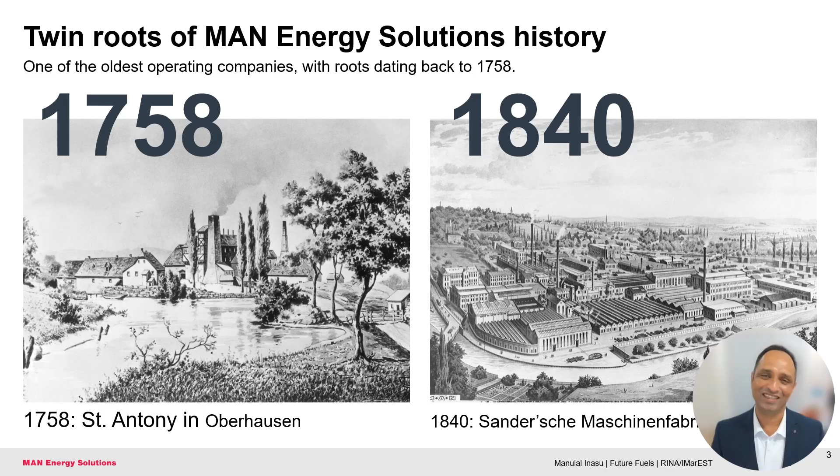He, of course, faced significant resistance from the fossil fuel industry, especially from the coal industry. This kind of innovation often demands courage and foresight. It was Heinrich von Buz, the general director of MAN at the time, who saw the enormous potential in Diesel's ideas. So MAN's unwavering financial and technical support was instrumental in bringing Diesel's revolutionary vision to life, giving the world one of its most significant technological advancements, the diesel engine.

So here is an interesting bit of history that might surprise you. When Rudolf Diesel demonstrated his engine at the 1900 Paris exposition, he didn't use petroleum-based fuel. He actually ran the engine on peanut oil. Yes, peanut oil. Diesel believed that farmers can grow and produce their own sustainable fuel long before sustainability became the global concern it is today.

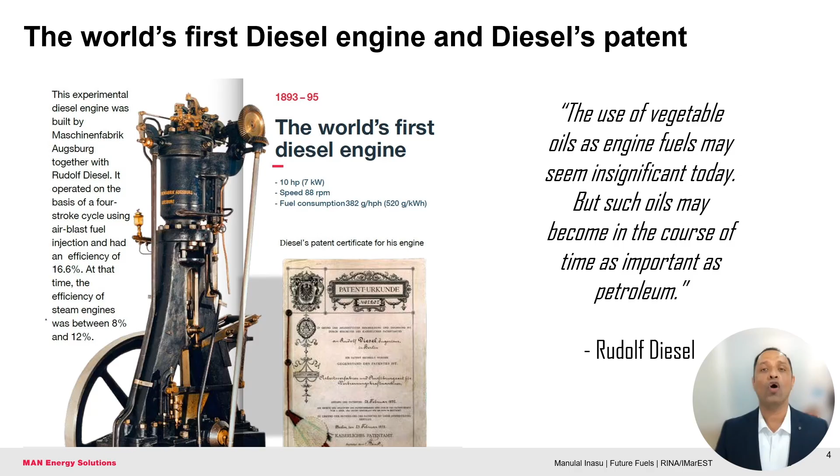When Rudolf Diesel said this more than a century ago, it might have sounded idealistic, but today it sounds prophetic. As we gather today to discuss future fuels and confront the urgent need for sustainability and decarbonization, his words have taken a new and powerful meaning. What was once a distant possibility is now a pressing reality, and the shift he imagined is the very path we are now walking. It's a reminder that innovation in fuel isn't new, and the seeds of today's transition were planted long ago. At MAN Energy Solutions, we proudly continue Rudolf Diesel's legacy, driving forward with an ongoing commitment to innovation and sustainability.

Now, let's move on to the next topic on the agenda, which is an overview of future fuels. In this section, I'll share a few slides highlighting key global trends, including how the world population and seaborne trade are evolving. We will also explore what the future fuel scenario looks like from MAN's perspective.

Let's first take a step back and look at why this is important and what role we at MAN play in the decarbonization of world trade, thereby contributing towards the sustainability goals set by the UN.

Today, nearly 90% of global freight is transported by sea. The vast majority of this freight is carried by large ocean-going vessels powered by two-stroke engines. Out of approximately 33,000 vessels in operation globally, around 24,000 are equipped with MAN B&W two-stroke engines. In addition, there are roughly 12,000 MAN four-stroke propulsion engines currently in operation.

Clearly, as a market leader, we feel an immense responsibility to drive this change towards decarbonization. We are committed to leading technology development in marine propulsion. Most importantly, we ensure that this progress happens in the safest possible manner, which lies at the core of our development process.

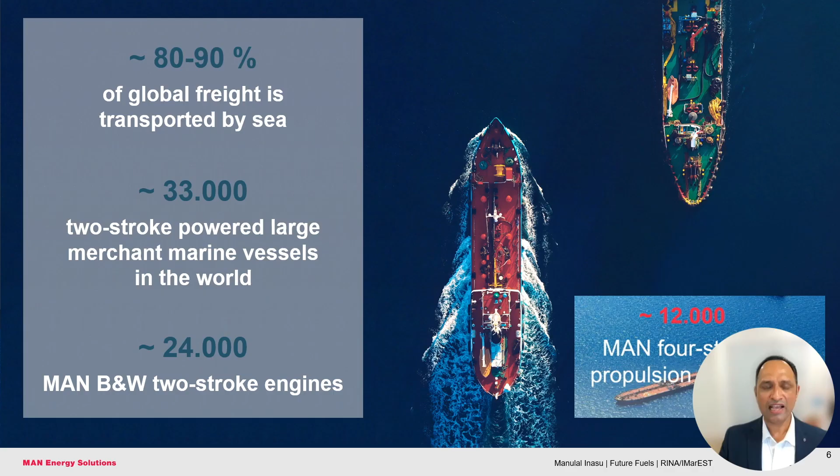Looking ahead, in the next 25 years until 2050, the population will increase by another 2 billion people. That's a current estimation. This will continue to drive increased demand for energy, infrastructure, food, consumer goods, and more. Since seaborne trade remains by far the most cost efficient and environmentally friendly way to transport goods, we expect that history will repeat itself and global trade will keep expanding.

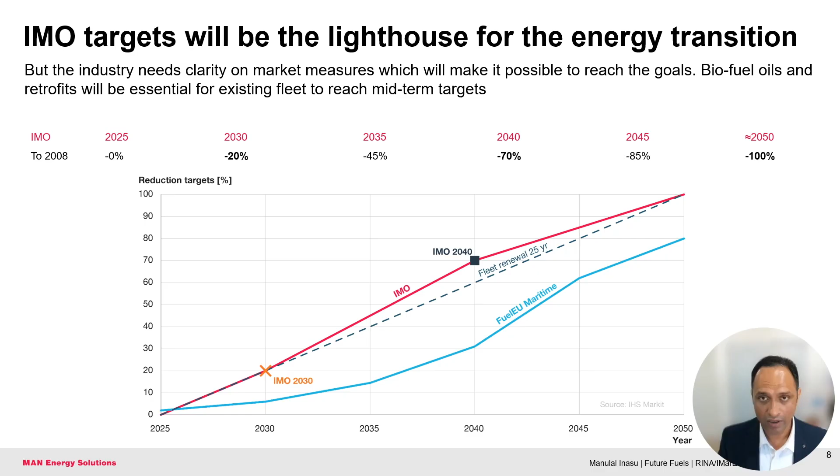And after all these, soon we will introduce our ammonia engines. Altogether, more than 1,400 dual fuel engines are in operation or in the order book, and this number is continuing to grow. So clearly, there is significant change happening, and this transition is gaining momentum.

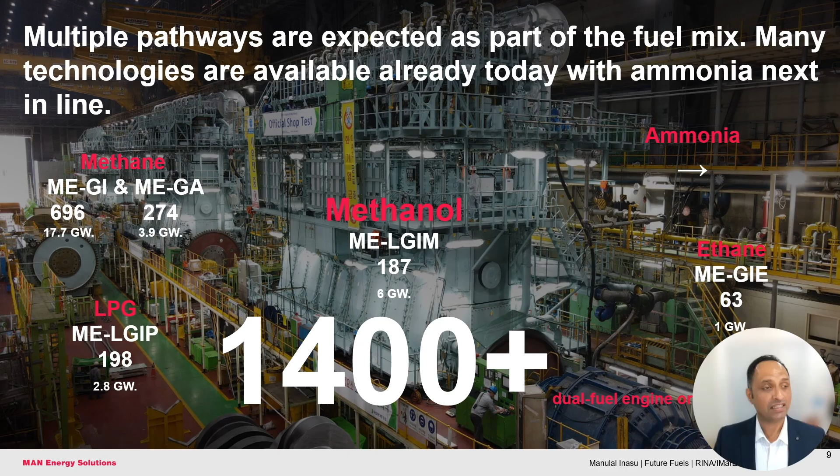So, what will the future fuel mix look like? In fact, this is the most important question facing our industry today, the one everyone is trying to predict. But it's not an easy question to answer, because the future fuel mix depends on many factors.

Earlier, I showed you the IMO targets set at MEPC 80, but I didn't mention the so-called midterm measures, which will be approved in 2025 and are scheduled to come into effect by 2027. These midterm measures will significantly influence which future fuels become economically optimal. Of course, the optimal choice will also depend on factors like ship type and size, technology readiness, operating expenditure, capital expenditure, and specific trading patterns. So all these factors will shape the future fuel decisions in shipping.

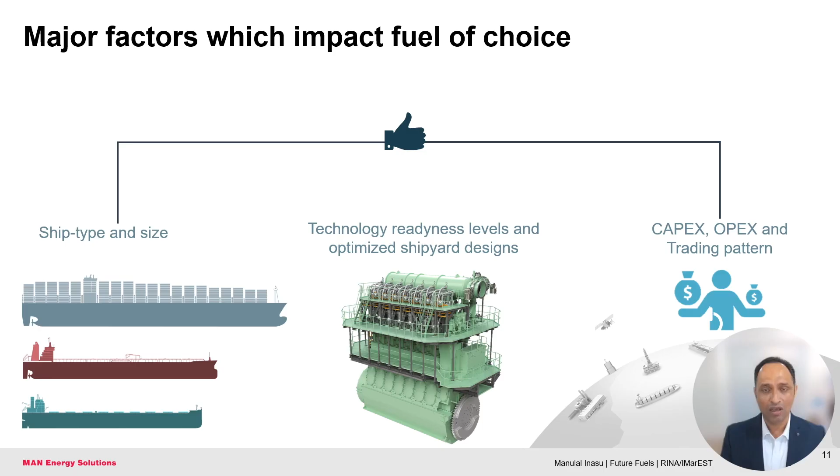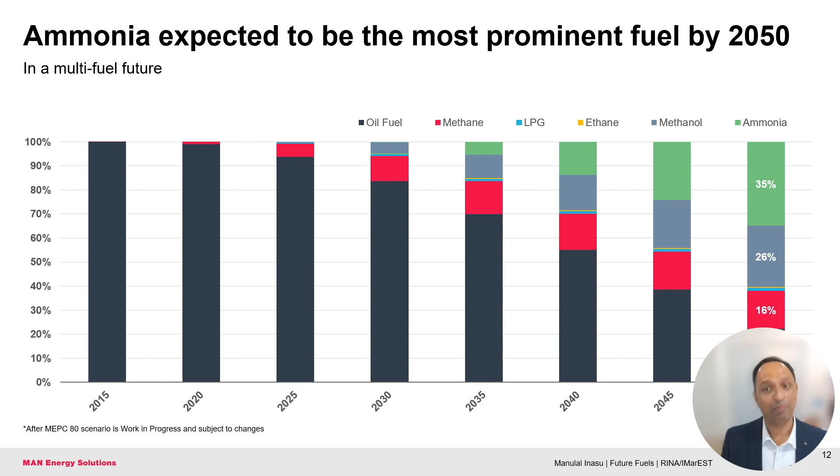So here is the next point in our agenda, which is focus on two-stroke ammonia. Even though all the fuel options besides traditional fuel oil or diesel can be considered future fuels for the maritime industry, from our perspective as an engine builder, most of these fuels are actually current fuels. This is because we already have engines successfully operating on these alternative fuel options today. So as an engine builder, when I speak about future fuels, I would like to spend some more time discussing ammonia. Ammonia, from our perspective, truly represents a future fuel in every sense of that word.

So why is ammonia considered a relevant fuel? First and foremost, ammonia has the potential for zero tank-to-wake CO2 emissions, essentially covering scope 1 emissions for the ship owner and scope 2 emissions for their direct customers. Additionally, ammonia can achieve zero or near zero well-to-wake emissions if it's produced as green ammonia, which would also address scope 3 emissions for cargo owners.

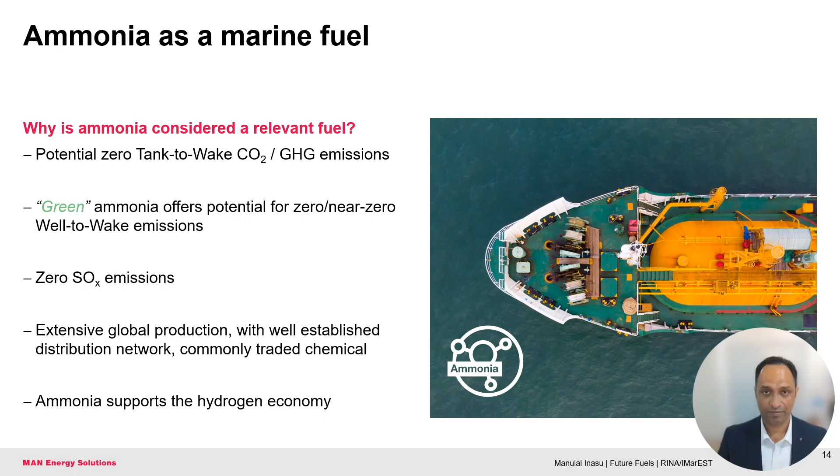Now, what's the status of our ammonia engine development? Our colleagues in research and development have made tremendous progress in recent years. I would like to quickly highlight some of their recent achievements. We have successfully run single cylinder tests on our research engine for a full year in our Copenhagen Research Center.

Five months ago, we initiated full-scale testing with our four-cylinder test engine. In January this year, we reached a significant milestone by achieving 100% engine load on ammonia with this test engine. In Japan, we recently saw the first commercial engine running successfully on ammonia.

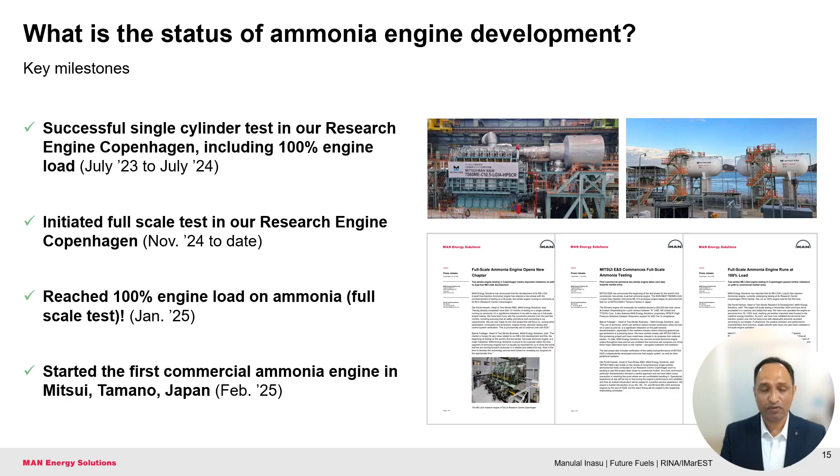To provide some context, developing an ammonia engine is no small task, and we don't compare it to any previous engine development projects. Due to ammonia's characteristics, especially its toxicity, attempting to fast track its adoption would be highly questionable. Therefore, we have adopted a very rigorous and careful development approach, which has also led us to choose a market launch strategy that differs from other alternative fuels.

Our ammonia engine journey started in 2019, over 6 years ago. Then we partnered with leading universities to study ammonia's combustion properties. In 2020, we received our second test engine in Copenhagen. Throughout 2021 and 2022, we worked extensively on specifying the fuel auxiliary and safety systems, and engaged closely with the municipality and relevant authorities to secure all the necessary permits.

Anyone who has visited our facility in Copenhagen knows there is a public school right across the street, which made it crucial for us to maintain a very transparent and thorough dialogue with the local authorities, especially regarding safety. This careful preparation paid off, and in 2023 we had our first ammonia bunkering, and then successfully conducted our initial single cylinder tests.

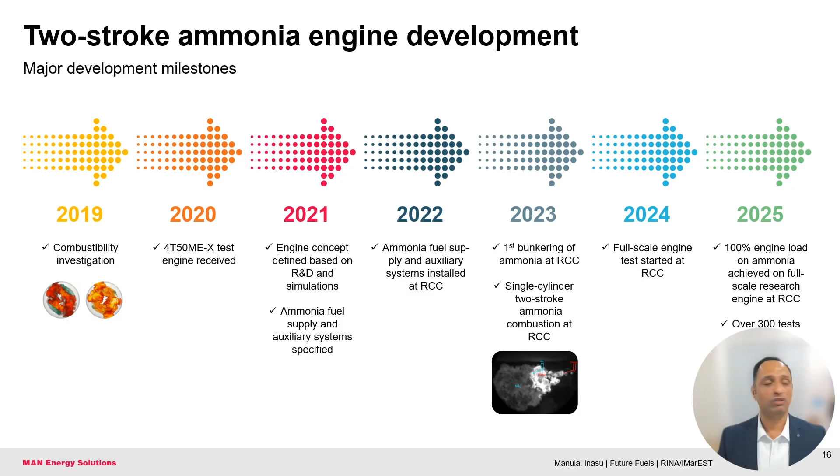After running the single cylinder setup for more than 12 months, we rebuilt the engine in mid 2024 to prepare for full scale testing, which we began in November 2024. Since then, we have got excellent test results, which we are pleased and proud to share with you.

So, MAN is announcing the start of a new reality for marine fuels. We can now openly say that ammonia as a marine fuel is indeed possible. Let's dive into some technical details that I hope you'll find interesting.

Here you see our ammonia engine testing setup in Copenhagen. It's a 4-cylinder 50-bore engine capable of delivering 6,300 kilowatts at a maximum speed of 123 RPM. All four cylinders are operating on ammonia, and they are equipped with extensive instrumentation with about 1,000 measurement points that help us gather essential development data.

The engine operates almost daily on ammonia, and we have already completed hundreds of hours of testing across many operational scenarios. In the following slides, I'll share some of the test results and general conditions which give us confidence that we have made significant progress in ammonia engine development.

We will begin by looking at the combustion characteristics across the engine as a whole. When the engine is running on ammonia, you can see here on the left side, we observe compression, combustion, and expansion curves very similar to other dual fuel engines. This consistent behavior is seen across various engine loads, shown here in a comparison with diesel and methanol. This is a very positive result, indicating efficient ammonia combustion comparable to diesel and methanol engines, with all engines tuned to the same maximum pressure Pmax level.

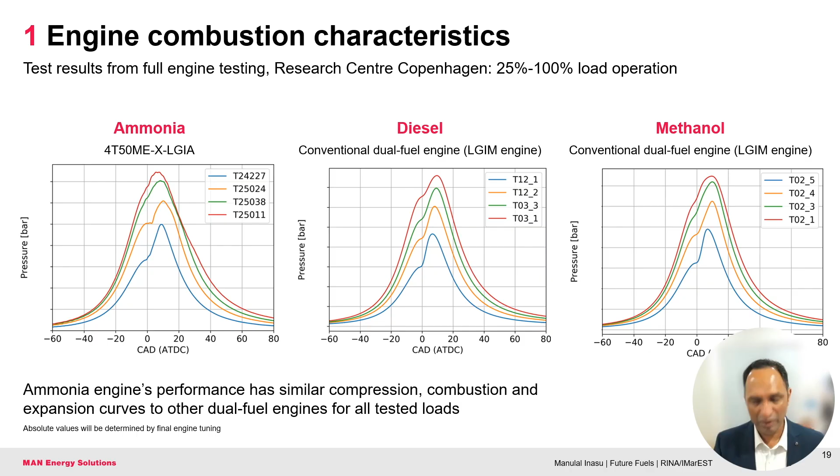Moving to the next slide, we will look at combustion stability in terms of cylinder to cylinder variation. What you are seeing here is a graph showing pressure variation inside each of the four cylinders while the engine is running on ammonia at around 75% load. Although there are four curves on this graph, one for each cylinder, you might only see one single curve. That's because the pressure traces from all four cylinders match so closely that they are practically indistinguishable. This is a really strong indicator of combustion stability and balance across the engine, made possible by our advanced engine control software, which ensures consistent combustion performance in every cylinder.

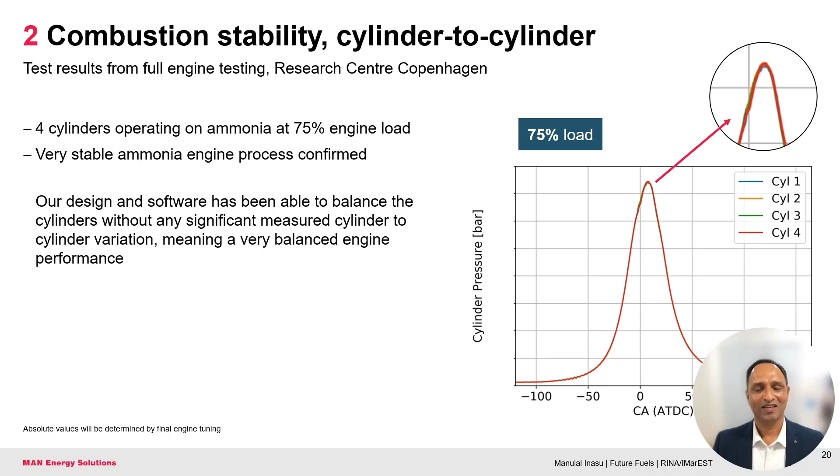Next, let's examine combustion stability from cycle to cycle variation, or process stability over time. Here, we clearly see similar pressure deviations for ammonia compared to diesel, which is impressive given the fundamental difference between a hydrocarbon fuel and a nitrogen-hydrogen based fuel like ammonia. Even at a high load condition of around 75%, we observe negligible deviations, confirming the robustness and stability of our ammonia engine.

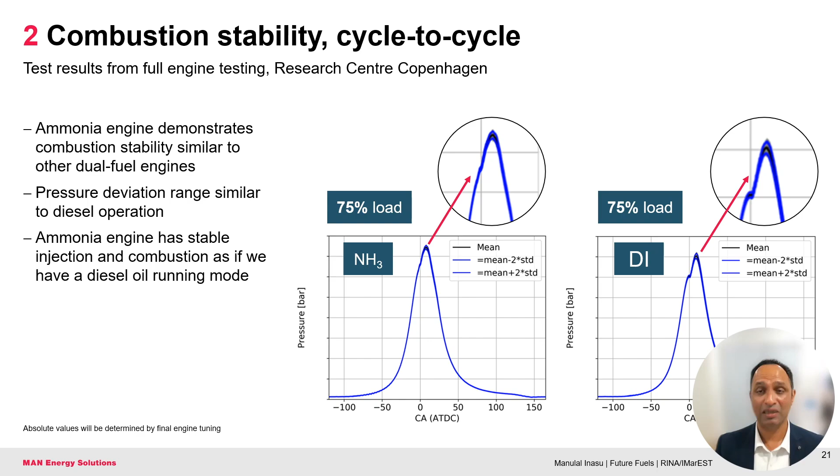So we use a water brake setup in the test facility, and then we can simulate these light and heavy running conditions. Our tests under these realistic sailing conditions show remarkable stability of the ammonia engine. These tests also enable us to confidently state that shaft generators or PTO (power takeoff) solutions can be applied with our ammonia engines, just like in the case of other dual fuel engines.

The SCR catalyst will always remain active, effectively reducing NOx emissions. The SCR is not only needed for the NOx, it's also needed to neutralize the ammonia slip. So our aim is to have ammonia slip just slightly below the NOx levels, and therefore they will cancel each other out in the presence of a catalyst.

On the subject of ammonia slip, I would like to highlight our advanced injection technologies, which significantly influence ammonia slip characteristics. We are currently testing multiple injection methods and aiming for the optimal balance between ammonia slip and NOx emissions. Although the legislative targets for ammonia slip are not yet finalized, our internal goal remains ambitious, aiming for a very low ammonia slip level.

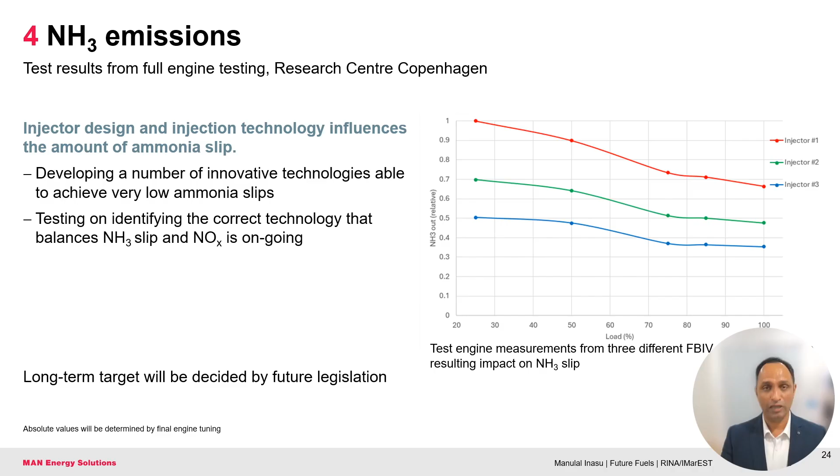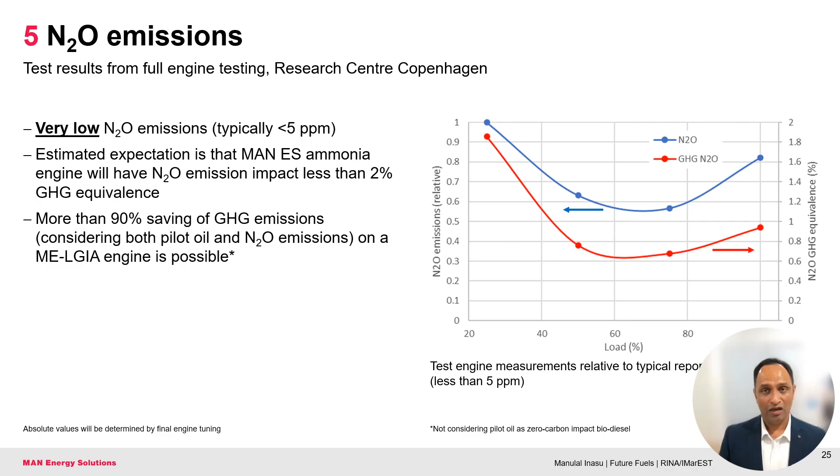Now I would like to share some important findings about nitrous oxide, or laughing gas, which is a highly potent greenhouse gas with around 300 times the global warming potential of CO2. Extensive testing and measurements show nitrous oxide emissions from our ammonia engine are extremely low, typically below 5 ppm, which translates to a greenhouse gas impact of less than 2%. To put this in perspective, our ammonia engine achieves over 90% reduction in total greenhouse gas emissions compared to a traditional diesel engine. This is really an impressive achievement by our R&D team.

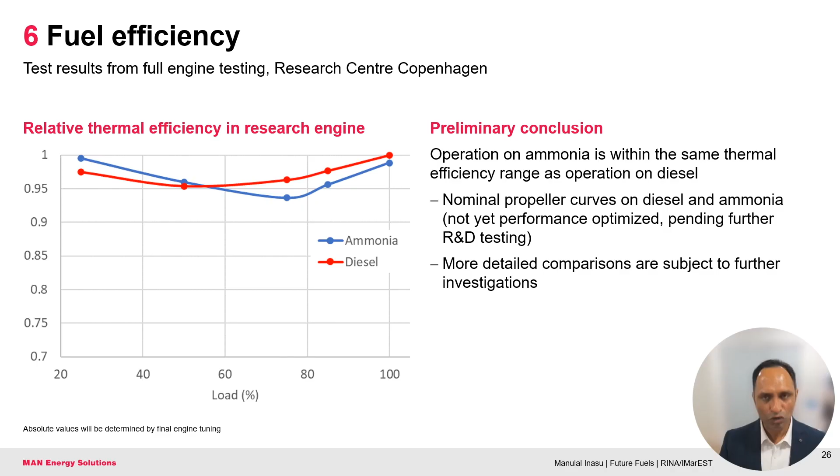Although you might see some small differences later on, the overall picture is clear: ammonia has the potential to match diesel in terms of thermal efficiency. So even when accounting for factors like ammonia's evaporation energy, our measurements show that the overall efficiency levels out thanks to the higher combustion efficiency observed in the research engine.

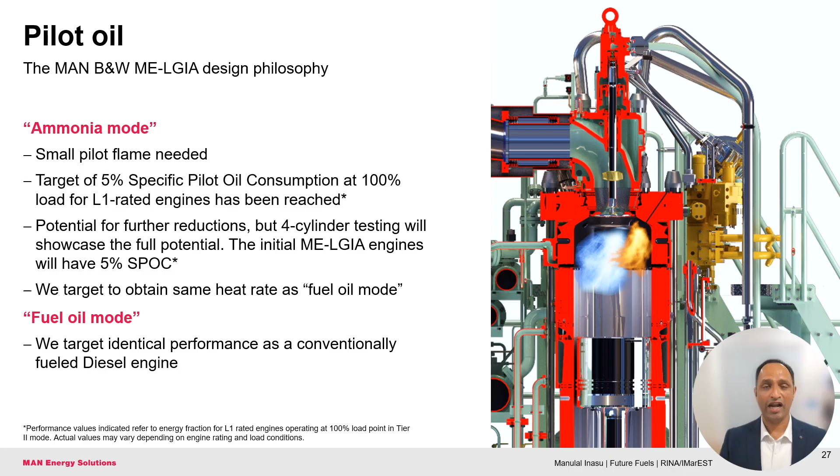This slide shows a few points about pilot fuel oil consumption. Regarding pilot oil consumption, we have confirmed our R&D target of 5% pilot oil consumption at full engine load for an L1 rated engine. This aligns with other dual fuel engines like a methanol dual fuel engine. And when it comes to fuel oil mode, we have already seen identical engine performance as a conventional fuel engine.

I would like to mention a few points on cylinder and piston ring conditions observed in our ammonia test engine. Both the single cylinder tests running for over a year now and the ongoing full scale engine test show excellent component conditions. We are using the proven 3-ring pack configuration from our other dual fuel engines. This is performing exceptionally well, showing minimal wear and virtually no deposits, mainly due to the low carbon content in the combustion process. We have been successfully using BN40 category 2 cylinder oil and will recommend this for commercial applications.

There were countless scavenging space inspections on the test engine. No ammonia has been found on pistons or other components. We have never detected ammonia odors or alarm triggering levels of ammonia, confirming our system is completely gas tight.

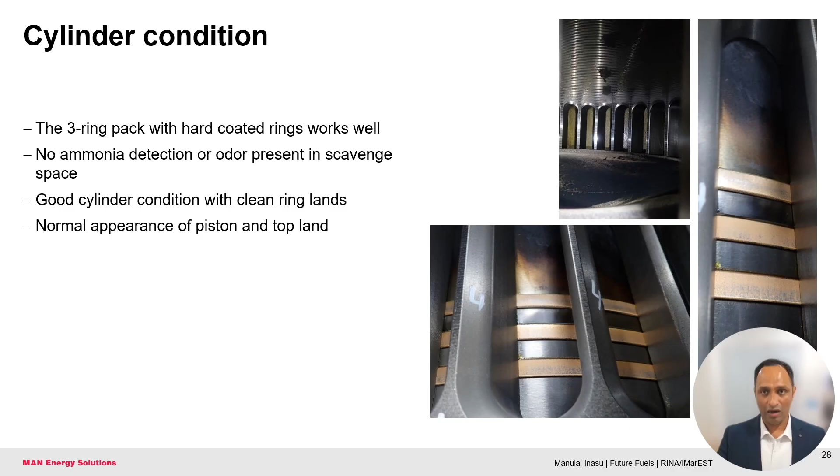I hope that throughout this presentation, you have been able to sense just how excited and proud we are of what has been achieved, both by our engineering team and our R&D colleagues. The progress made so far gives us great deal of confidence in ammonia as a marine fuel and the role that MAN Energy Solutions will play in its future adoption.

I would like to take a moment now to talk about our market introduction plan for the ammonia engine. We are currently involved in several pilot projects.

We have chosen this phased approach deliberately before going for a full sales release because we want to make sure that the introduction of ammonia as a marine fuel happens in a safe and controlled way. We want to gain real world seagoing operational experience that's positive and safe before we fully open up for commercial sales.

The exact timing will naturally depend on shipyard schedules and the finalization of international rules and regulations related to ammonia as a fuel. But our best estimate for a full sales release of the ammonia engine for our G50, S60, G60, G70, and G80 engine platforms is around the fourth quarter of 2026.

The pilot projects we are engaged in include very large ammonia carriers, large bulk carriers, and pure car and truck carriers. And we are also in discussions for the first ammonia fueled container vessel.

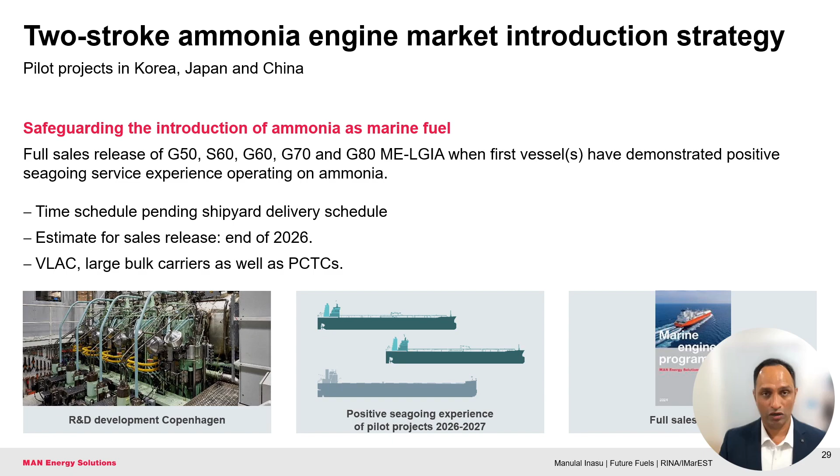I'm happy to mention one of these pilot projects. This is the first signed contract for a ME-LGIA ammonia engine, and it's with our long-standing partner, Eastern Pacific Shipping. They will be building two very large ammonia carriers at HD Hyundai Heavy Industries in Ulsan.

The engine for these vessels will be a 6 G60 ME-LGIA, and we expect the first engine to be delivered around January or February 2026. This engine will then be handed over to the shipyard for further construction of the ship.

We are deeply involved in this project and feel very encouraged by the strong collaboration with Eastern Pacific Shipping, Hyundai Shipyard, and our licensee partner at Hyundai. So we are definitely moving in the right direction and, more importantly, at the right pace.

To summarize, based on the very promising results from more than 300 test runs on both the single cylinder and four cylinder setups, we believe ammonia will play a key role in the multi-fuel future of shipping.

We are aiming for a full commercial release by the end of 2026, but that will be based on successful seagoing experience. Our engine development work is progressing in parallel with the finalization of rules and regulatory framework. And we think it's the right decision to wait for that regulatory clarity before launching on a full commercial scale.

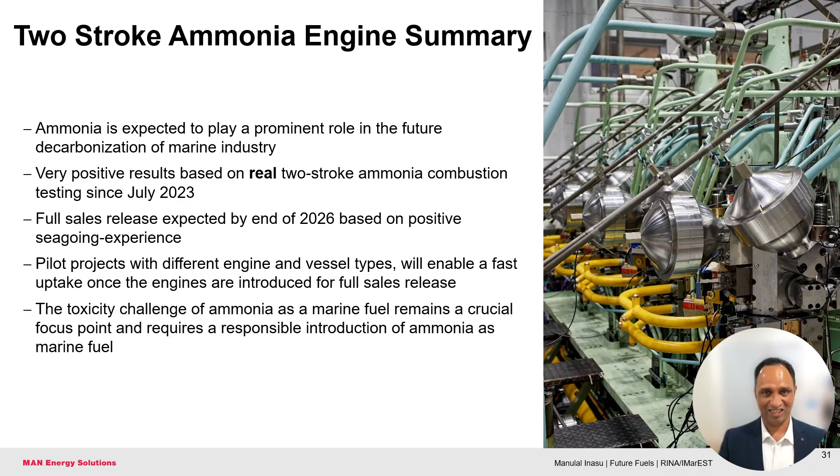So the next topic in the agenda is future fuels in four-stroke engines. Earlier I discussed in detail the steps we are taking with the two-stroke engines to prepare for alternative fuels. Since we are nearing the end of the presentation and I want to stay within the allotted time, I won't be going into the same level of detail here.

Instead, I'll just give you a quick overview of our four-stroke fuel initiatives to give you a sense of the directions we are heading in. The approach is tailored to the four-stroke segment, but the overall objective remains the same: supporting the industry's transition towards cleaner fuels.

Because of the larger size and scale of our two-stroke engines, it's relatively easier to conduct experimental trials on two-stroke engines. But the good news is many of these insights and results from those trials can be applied to our four-stroke engines as well.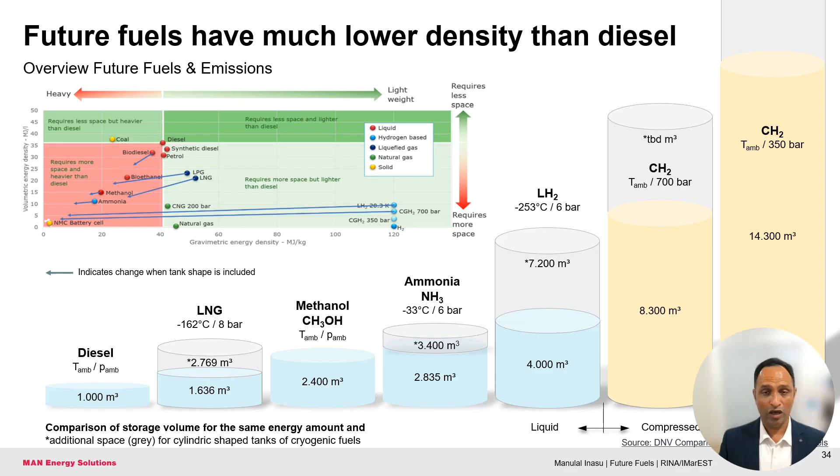The gray area in the bars also shows additional space required due to the cylindrical shape of the cryogenic or high pressure tanks, which adds to the overall volume needed on board. So one of the key challenges with adopting alternative fuels is not just the engine technology, but also accommodating the much larger fuel storage systems within the limited space available on board ships.

This slide shows the three different types of injection technologies possible for alternative fuels in four-stroke engines. Each of these is suited to different fuels depending on the combustion characteristics and technical requirements.

The middle one is low pressure port fuel injection, which follows the Otto cycle. It's the simplest to implement and the easiest to retrofit, so it's often the starting point. However, it comes with some limitations. For example, in methanol application, only up to 70% of the fuel can be methanol, with the rest still needing to be diesel. This method can also be used for hydrogen, but again only in small quantities, up to 25% by volume. The left one is high pressure direct injection, which works on the diesel cycle.

This is essential for ammonia, since ammonia has very poor ignition characteristics and burns quite slowly. High pressure direct injection can also be used for methanol and allows much higher substitution ratios, up to 95%, while offering better efficiency. The third one, on the right, is low pressure direct injection, which again follows the Otto cycle. This setup is ideal for hydrogen.

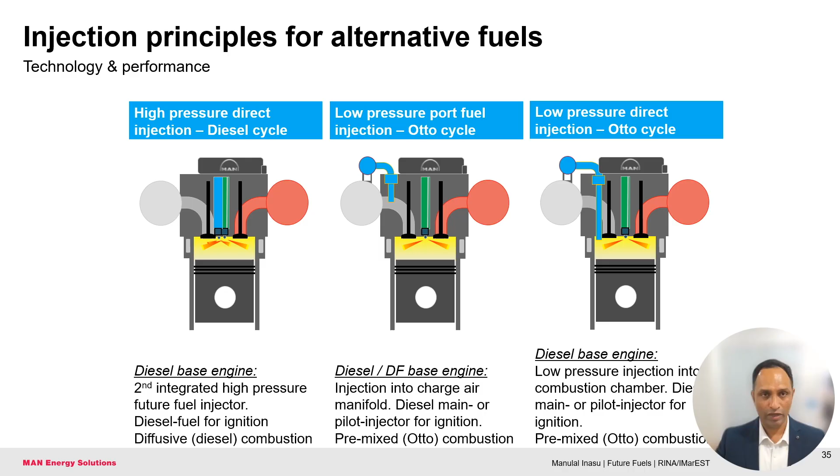So as you can see, there is no one size fits all solution when it comes to injection systems for future fuels. The choice depends on a range of factors like market needs, customer preferences, regulatory frameworks, and the technical capabilities of each fuel. That's why we spent considerable time and resources analyzing different scenarios and speaking with customers before finalizing our development roadmap.

This slide gives a comparative overview of the feasibility of using methanol, ammonia, and hydrogen as future fuels in four-stroke engines. The table is color-coded to indicate increasing levels of feasibility, from red being the least feasible to green being the most. It considers a range of factors, including fuel properties, safety, availability, and price.

As a general conclusion, methanol currently appears to be the most realistic option in the short to medium term. That said, the best choice of fuel also depends heavily on the specific ship type and its operational profile.

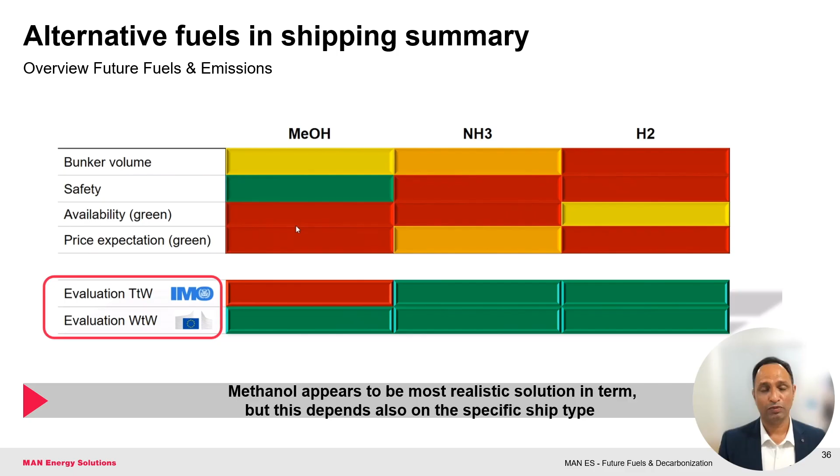In this slide, you can see MAN's four-stroke methanol engine roadmap as of early 2025. It outlines both retrofit availability and new engine deliveries across different engine platforms, giving a clear picture of how MAN is progressing with methanol solutions.

On the retrofit side, we can see that several engines are already being prepared for conversion to methanol, including the 21/31DE, 48/60 common rail, and 32/44 common rail. On the new build side, you can see methanol ready certified engines, which means they are built with future conversion in mind. The 175D is another important platform.

It's our state-of-the-art high-speed engine, and it's planned for both retrofit capability and full dual fuel methanol operation as a new build option.

The key takeaway here is that MAN is taking a strategic and phased approach, prioritizing both retrofit solutions for existing fleets and new engine platforms with built-in methanol readiness. This approach gives ship owners flexibility, whether they want to act now or prepare for a future switch depending on fuel availability and regulatory developments.

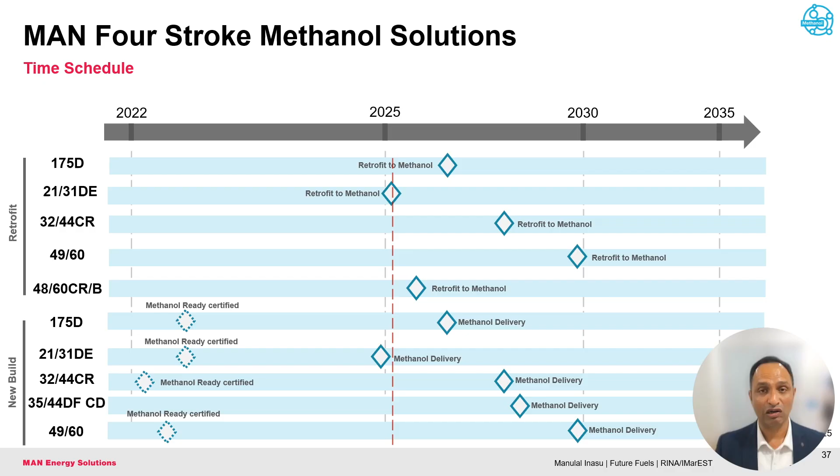Here we see an overview of the key engine modifications required when adapting our engines to run on future fuels. As we shift to fuels like methanol, ammonia, and hydrogen, several parts of the engine need to be adapted or upgraded. Starting with the fuel injection system, since these fuels have lower energy density, we often need a higher mass flow, which means using larger injection systems or additional injectors. That in turn affects the cylinder head design, because we need to make room for the extra injectors.

Sealing is another critical area. Methanol and ammonia are quite aggressive, so only certain materials can handle long-term exposure to these fuels. The fuel piping may also need to be replaced or upgraded. Stainless steel, for example, is required in hydrogen applications.

On the piston side, changes are mostly relevant for diesel engines during retrofitting, and not typically for dual fuel engines like LNG diesel. We also need to update the engine electronics to manage the new combustion parameters, and install upgraded control systems. In addition, adapted safety systems are essential, things like double-walled pipes, drainage systems, and fuel leak detectors all become part of the setup. Finally, to meet IMO Tier 3 emissions, we may need to integrate exhaust after-treatment systems like SCR for NOx reduction.

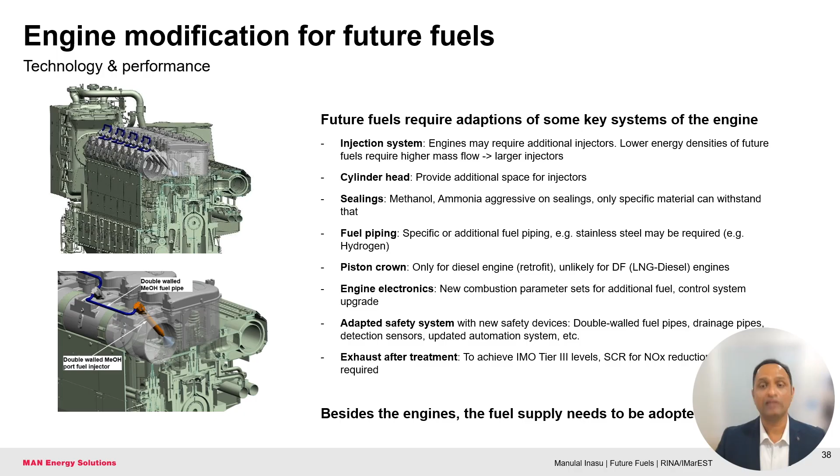And of course, beyond the engine itself, the onboard fuel supply system also needs to be adapted accordingly.

This slide explains the concept of retrofitting existing engines to run as dual fuel engines using methanol port fuel injection, or PFI. In this setup, methanol is injected into the intake ports, while diesel acts as the pilot fuel for ignition, following a pre-mixed Otto combustion process.

One of the biggest advantages of this concept is that it's a relatively easy retrofit solution for existing engines without requiring major redesigns.

The methanol fuel supply and onboard systems are simple and robust, avoiding the need for complex high-pressure equipment. It also allows for a high share of methanol in engine operation, and when combined with biodiesel, the engine can run in a fully carbon neutral mode.

This system is designed to be flexible, so operators can switch between diesel and methanol depending on availability or operating conditions. Another key benefit is that the conversion can be done progressively during planned maintenance stops by installing methanol-ready parts in place of standard service parts.

Thanks to this modular design, it's even possible to carry out the retrofit at sea, which helps minimize the downtime and disruption of vessel operations.

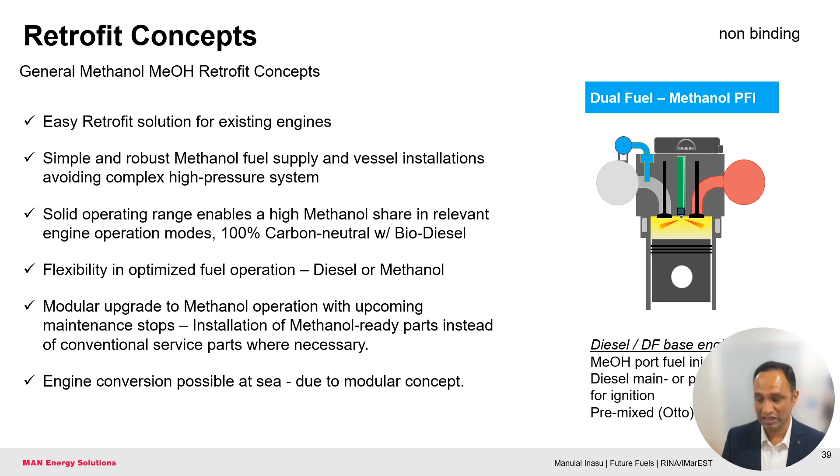This slide covers the concept of retrofitting an engine to a high pressure direct injection, or HPDI, dual fuel system for methanol. In this setup, methanol is directly injected at high pressure into the combustion chamber, following a diesel combustion principle, with diesel acting as the ignition source.

This concept is already proven in two-stroke engines and offers a reliable path forward for four-stroke engines as well. This system is optimized to enable very high methanol share across the full engine load range, and when combined with minimal biodiesel, it can operate in a fully carbon neutral mode.

A major advantage here is the emission performance because of the cleaner combustion process. There may be less need for exhaust after treatment systems. Just like the port fuel injection concept, this system also offers operational flexibility, allowing a switch between methanol and diesel depending on fuel availability or operational requirements.

Similar to the PFI concept, the retrofit process here is also modular. During routine maintenance stops, methanol-ready parts can be installed in place of standard ones to prepare the engine step by step. Thanks to this modular nature, the full engine conversion can also be carried out at sea, making it practical and cost-effective for operators.

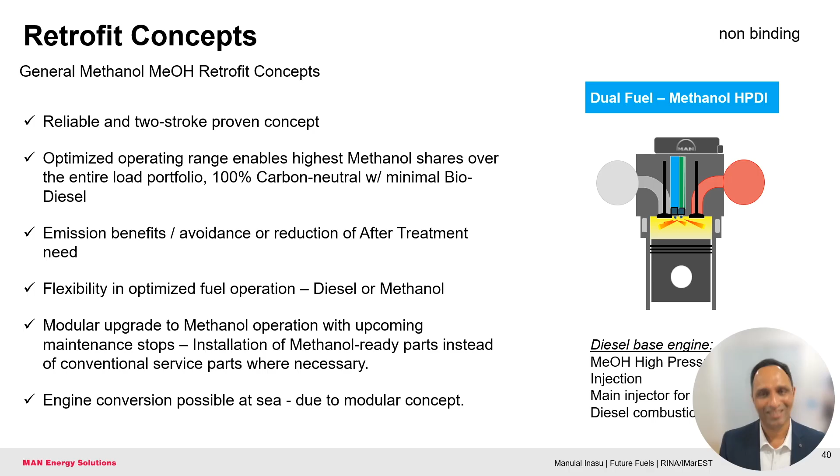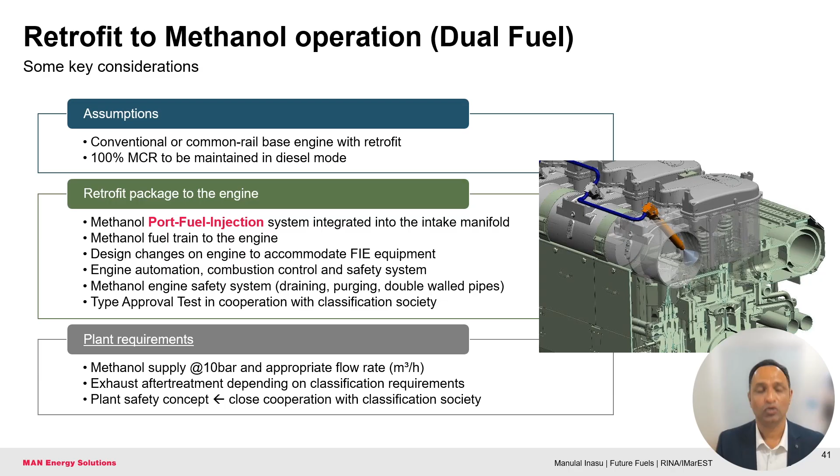Finally, a plant-wide safety concept must be developed and aligned with the classification society to ensure compliance and operational safety.